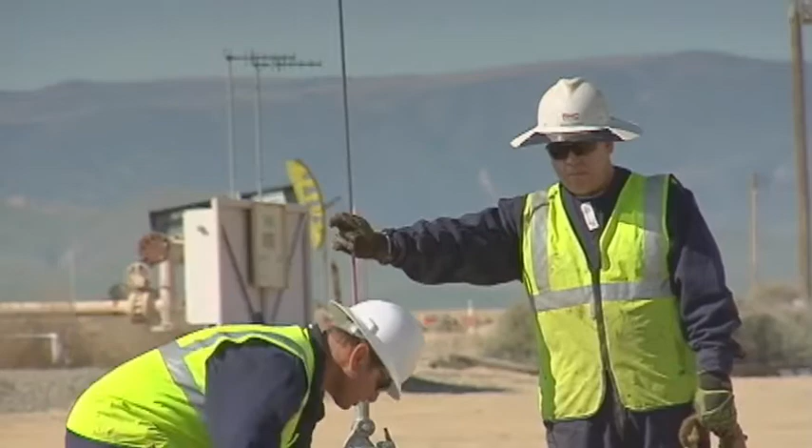This video is an overview of our safety expectations. We'll spend the next 30 minutes reviewing the critical safety issues that affect your work every day.

Let's start with the basics, your safety responsibilities. First, you must follow your company's safe work practices. Second, read the Contractor Safety Handbook provided by the producer. The handbook is your guide to safety expectations while working on our property. Keep it handy so that you can refer to it whenever you have questions.

We have developed this video to help you identify some of the hazards you might face on the job. Your company will give you details and training about the specific hazards at your job site. Hazard recognition and participating in safety tailgate meetings is important for you and your coworkers' safety.

Finally, some work areas will have additional requirements. Your company may have safety rules that are more strict than those of the oil producers. Check with your supervisor. You should recognize on-site safety rules cannot cover every possible situation. You still need to use your own good judgment.

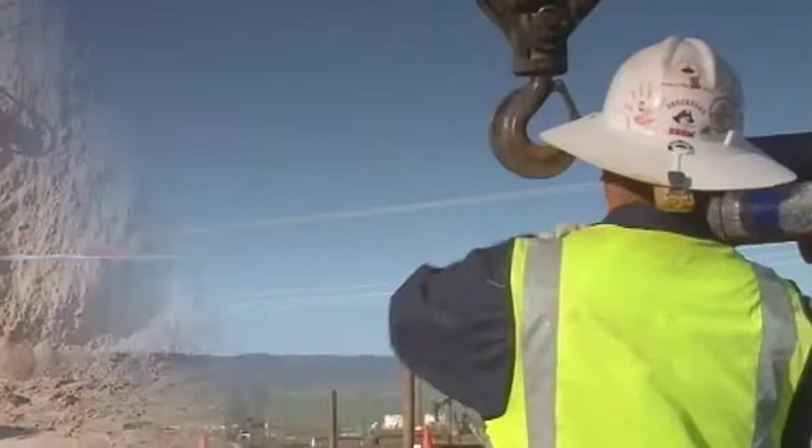As you begin your job, see that you wear proper clothing and the right personal protective equipment for your job. Stop any work that's not being done safely. You have the authority and the duty to stop unsafe work. Then correct the problem or safeguard the condition and report it to your supervisor.

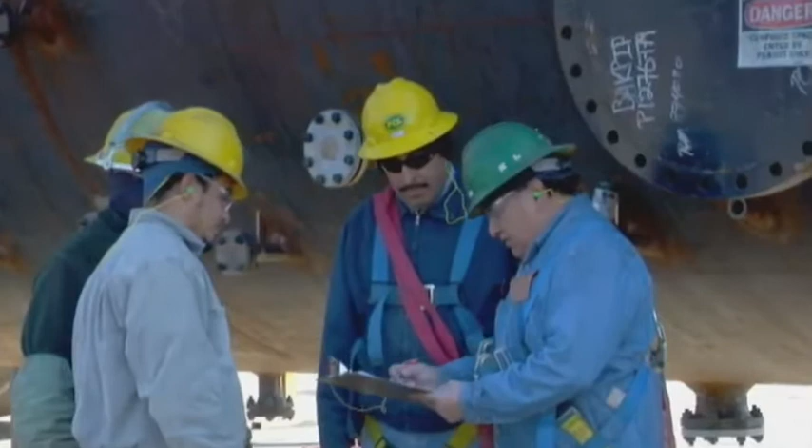All work must be planned. Your supervisor is responsible for planning work, but you must know and follow the plan. This planning includes emergencies and your responsibility to respond quickly in the event an incident or injury occurs.

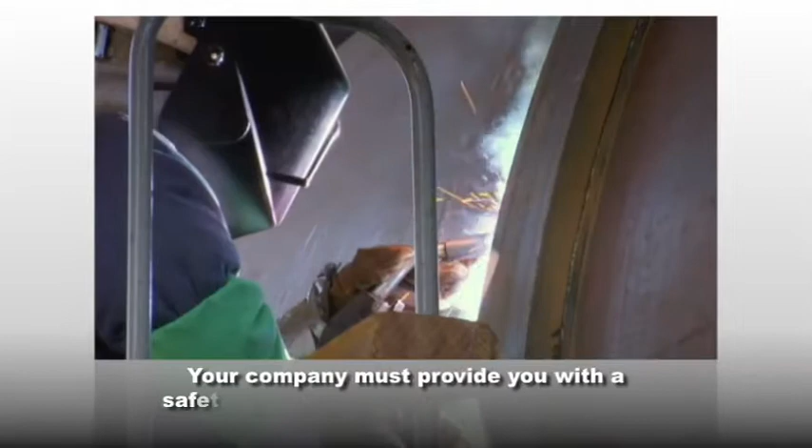Your company must provide you and your coworkers with a safety orientation and job-specific training. Your company must also provide the right tools and personal protective equipment in good working order.

Supervisors must know and follow all safety policies. They must notify the producer of incidents immediately, investigate all accidents, and then submit a report to the producer.

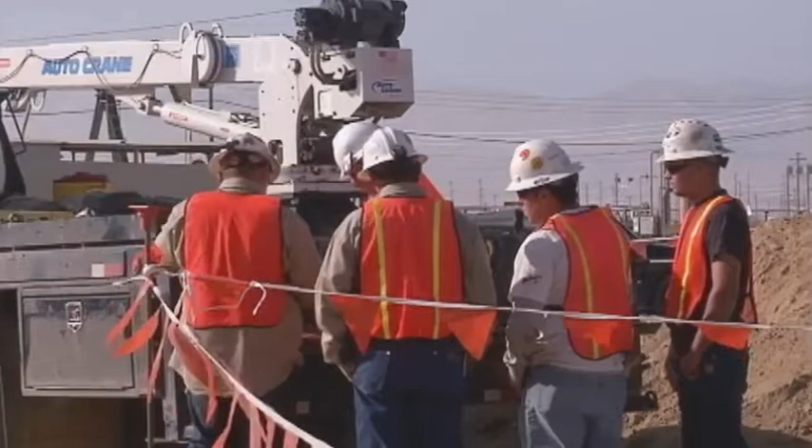Personal protective equipment, hydrogen sulfide (H2S), and respiratory protection. Now let's discuss the importance of personal protective equipment. Everyone who works at our locations must use basic personal protective equipment.

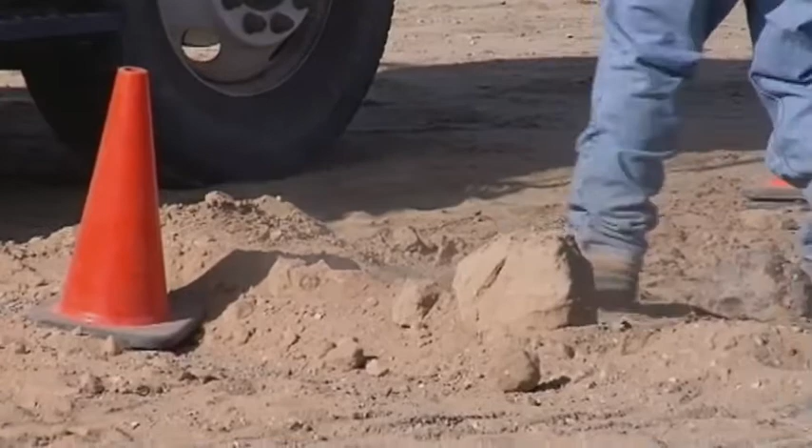We require everyone on the job site, including visitors, to wear an approved hard hat. Most producers require hard-toed safety footwear. Many producers require that everyone wear safety glasses with side shields or acceptable wraparound safety glasses. Some producers require snake chaps to be worn in certain situations.

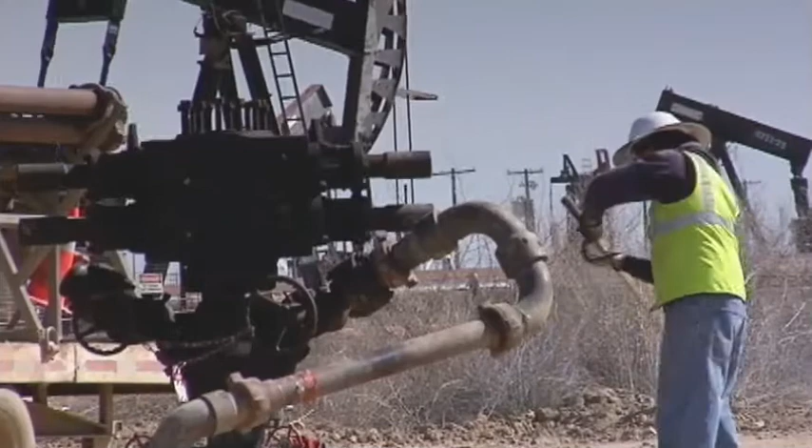Gloves must be used when the job requires it. You must wear proper work clothing, including long pants and a shirt with sleeves. Never wear loose or torn clothing or sleeveless shirts. Some producers do not allow hooded shirts or sweatshirts to be worn.

Most producers require fire-resistant clothing, FRC, to be worn. Consult with your supervisor with questions regarding this requirement. If your clothes get soaked with oil or any other substance that could catch fire or irritate your skin, change the clothes as soon as possible.

Some producers may have prohibitions regarding wearing rings or other jewelry while working on their properties. Please check with the producer you are working for regarding specific prohibitions or requirements.

Safety goggles and a plastic face shield must be worn when grinding, chipping, sawing, drilling, or hammering on metal. Chemical goggles must be worn anytime a splashing hazard exists. Approved hearing protection must be worn by all personnel working in or near posted areas, or if the job task requires it. Different jobs require specific safety equipment.

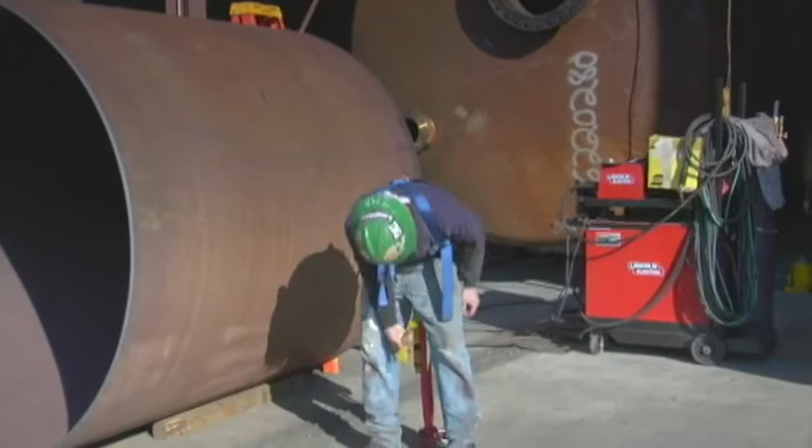For example, safety harnesses and lanyards must be worn by employees working at unprotected heights above the ground. Many locations produce crude oil and gas containing hydrogen sulfide, H2S, or sour gas. Hydrogen sulfide is poisonous and can be lethal in low concentrations.

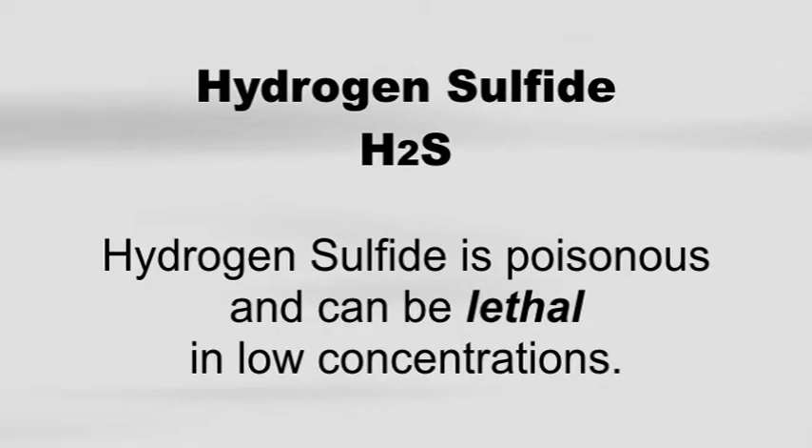All contract personnel working around production equipment, including well work and drilling operations that handles crude oil containing H2S, must be trained in H2S safety. Your company is responsible for providing you with appropriate respiratory protection and required training.

Many areas require the use of personal H2S monitors. You must be trained by your company in the operation of monitors. At a minimum, personal H2S monitors must alarm at 10 parts per million.

If your monitor alarms, move quickly crosswind, uphill, and away from the source. When working in a possible H2S environment, stay upwind of the potential source and plan a route of escape. Wind indicators are provided around equipment handling H2S and at rig locations. Never attempt to rescue an H2S victim unless you have a backup person available and have donned SCBA.

Communication is a critical part of any safety program.

Let's look at 3 important elements: the oil producer's safe work practices, the safe work permit, and energy control or lockout, tagout, blockout procedures. Safe work practices are a set of requirements that everyone must follow when working on our properties. A key section of safe work practices are the basic work rules.

Everyone must follow these rules at all times. Let's review these basic rules. Always act with safety in mind, both your own and your coworkers. Plan each job properly. Identify and address known hazards. Do not start the work unless you can do it safely. Stop or pause any unsafe job or operation.

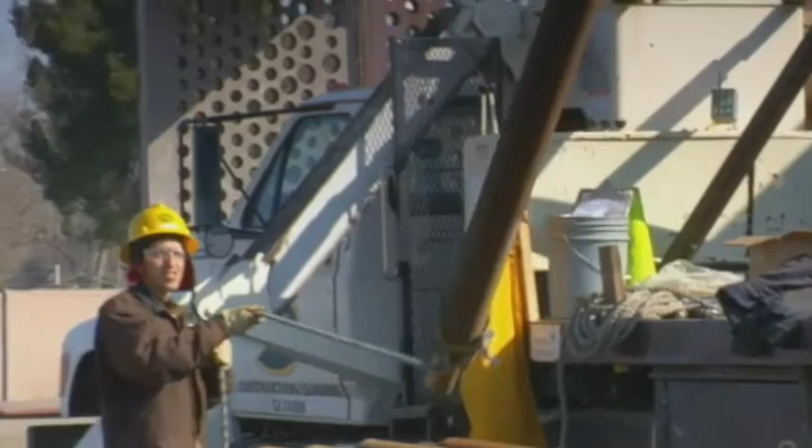Some areas in California can experience high daytime temperatures during work hours. Under these conditions, heat stress can be a serious danger and cause long-term illness or death. While working in these conditions, ensure that you and those around you drink plenty of water. Use good judgment during tasks that require strong physical exertion. If you feel too hot or experience dizziness or other symptoms, rest in the shade and carefully monitor your symptoms.

Seek medical help immediately if signs of heat exhaustion are manifest, such as hot, dry skin, profuse sweating, confusion or dizziness, nausea, or shallow breathing.

Do not work unless you are fit for duty. Do not work unless you are properly trained for the job. Do not take part in fighting, scuffling, horseplay, or any other activity that could injure someone. Comply with all posted warning signs. Wear required protective equipment. Use and maintain tools and equipment safely.

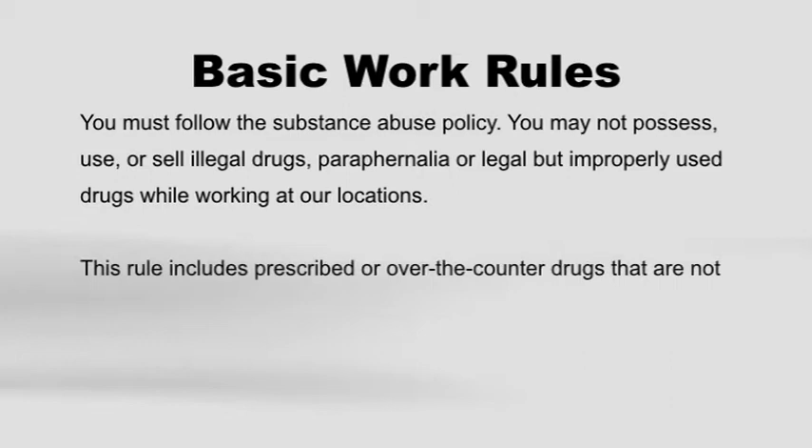Operate vehicles safely. You must follow the substance abuse policy. You may not possess, use, or sell illegal drugs, paraphernalia, or legal but improperly used drugs while working at our locations. This rule includes prescribed or over-the-counter drugs that are not used for the intended purpose.

Do not report or return to work when impaired by alcohol. You may not possess or use alcoholic beverages on our properties. You may not carry or use firearms, weapons, fireworks, explosives, live ammunition, or devices that will start fires. Do not remove, damage, or interfere with any safety device or warning sign. Smoke only in designated areas.

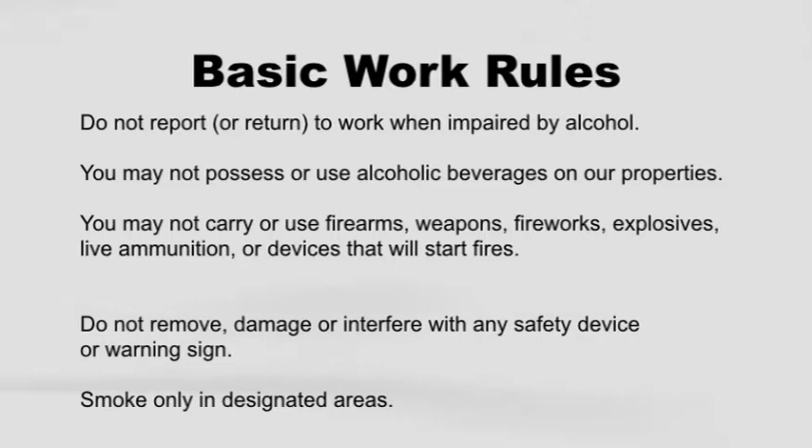Report all safety incidents to your supervisor right away. This includes personal injuries, equipment damage, and spills. Do not steal, damage, destroy, or remove any property belonging to the oil producers or its employees, contractors, or visitors. Make sure you have a means to call for help when working in isolated areas.

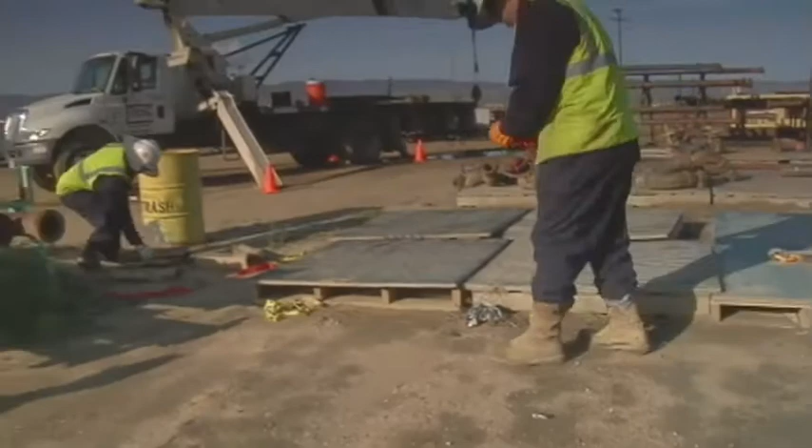Housekeeping rules are an important part of safe work practices. Always keep your work area clean and orderly. Make sure emergency exits are clear. Clean up mud, oil, grease, and litter right away. And make sure to collect trash and debris at least once a day.

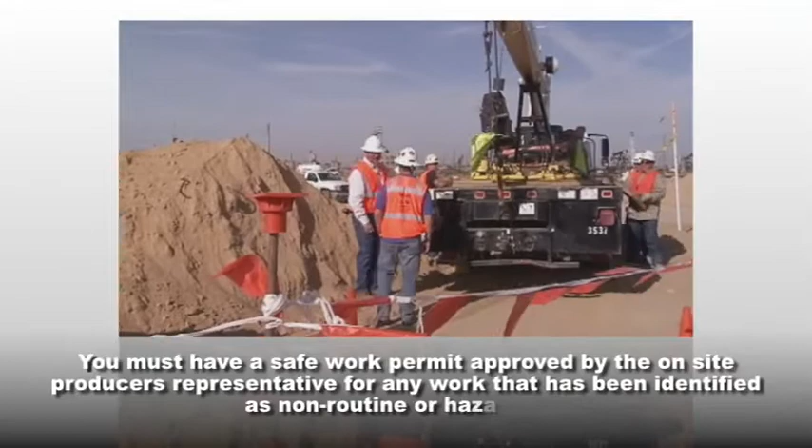You must have a safe work permit approved by the on-site producer's representative for any work that has been identified as non-routine or hazardous. Your supervisor will ask everyone involved to review the permit and then post it at the job site. Make sure you understand all the permit requirements before starting the job. Stop work if conditions change, a new hazard occurs, or an oil producer representative asks you to stop.

Now let's review some critical hazardous exposures that can be encountered while working on the oil producer's property. Hazardous stored energy. Energy control is required whenever you are performing tasks which involve equipment, machines, piping, or vessels which could potentially injure you due to a release of stored energy. Energy sources must be identified and isolated to a zero energy state before service and maintenance can be performed.

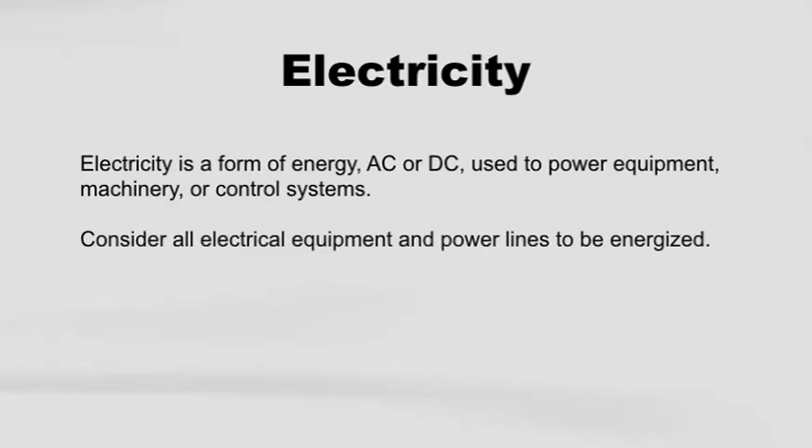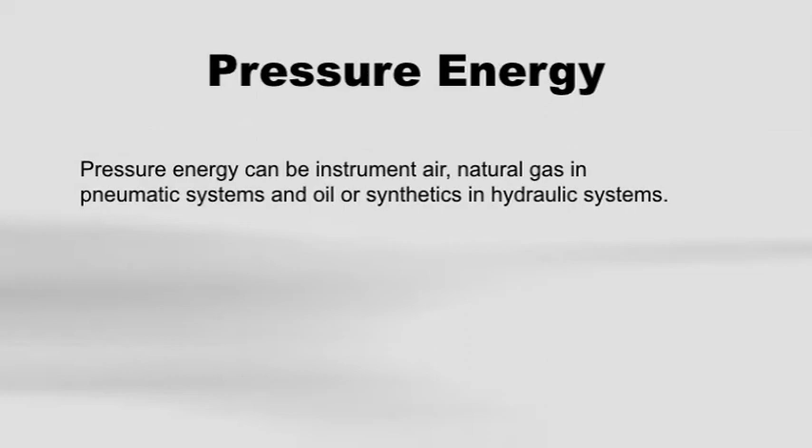Electricity is a form of energy, AC or DC, used to power equipment, machinery, or control systems. Consider all electrical equipment and power lines to be energized. Pressure energy can be instrument air, natural gas in pneumatic systems, and oil or synthetics in hydraulic systems. Momentum gravity energy is the force in moving equipment components caused by gravity or inertia.

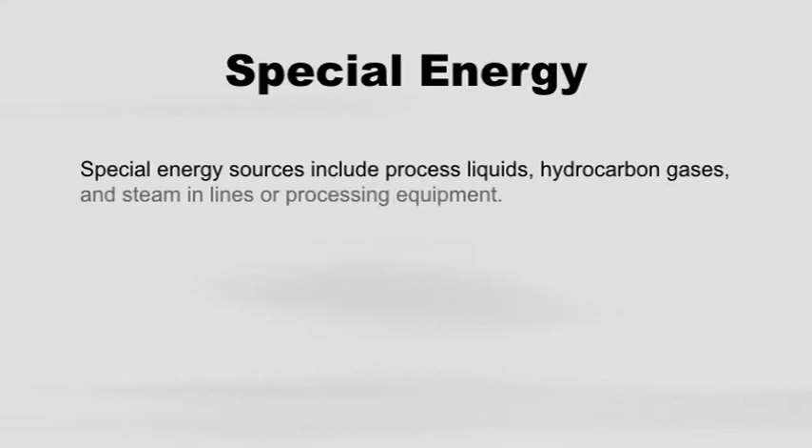It is critical to identify momentum energy after the power source has been shut off. Residual energy can occur after the power source has been shut off or disconnected. Special energy sources include process liquids, hydrocarbon gases, and steam in lines or processing equipment.

Methods of energy isolation. The following are ways to isolate energy sources. Positive physical isolation: remove spool, air gapping, blind flanges, slip blinds, double block and bleed, and lockout of energy source.

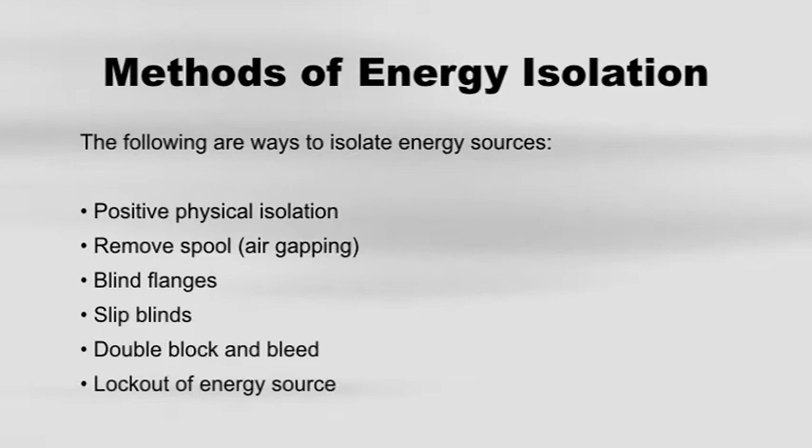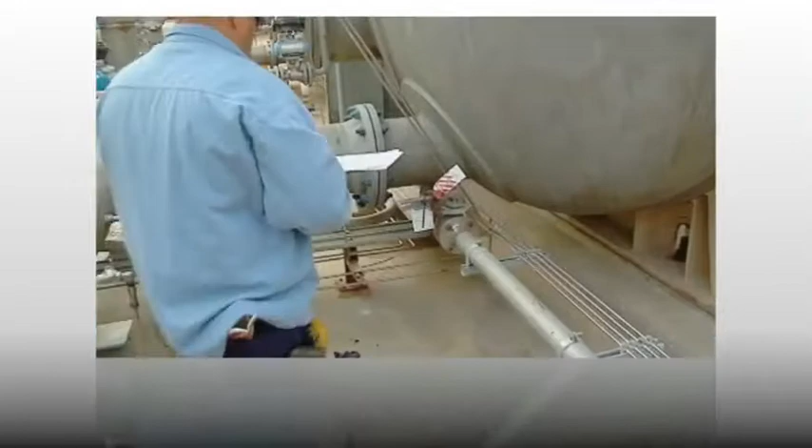Locks must be used with tags to isolate energy sources. Tags should indicate the person responsible for the lockout, the reason for the lockout, the job being performed, and the date. Each producer has developed equipment lockout, tagout, blockout procedures.

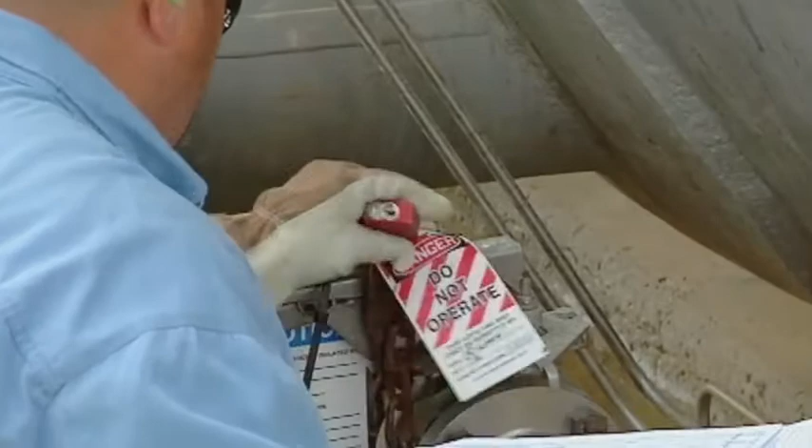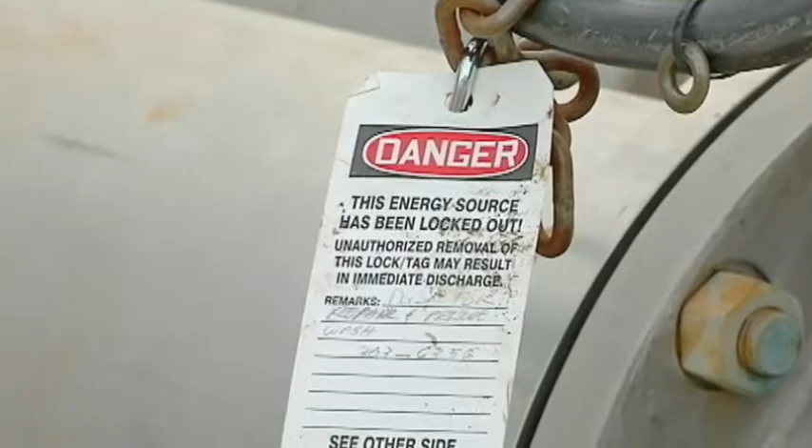Contractors must understand these requirements and assess how their own procedures will work in conjunction with the producers. Never shut down or start up equipment or open or close valves until you notify the producer's representative or have been directed to do so by the producer's representative.

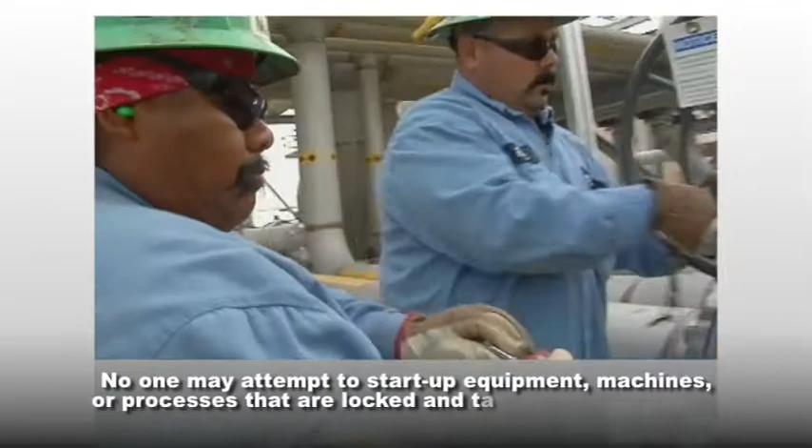Group locks can be used to isolate equipment for a group of workers. Lockout must provide the same level of protection as utilizing individual locks. No one may attempt to start up equipment, machines, or processes that are locked and tagged out of service. Specific procedures must be followed to restart, re-energize, or activate equipment or systems that have been isolated.

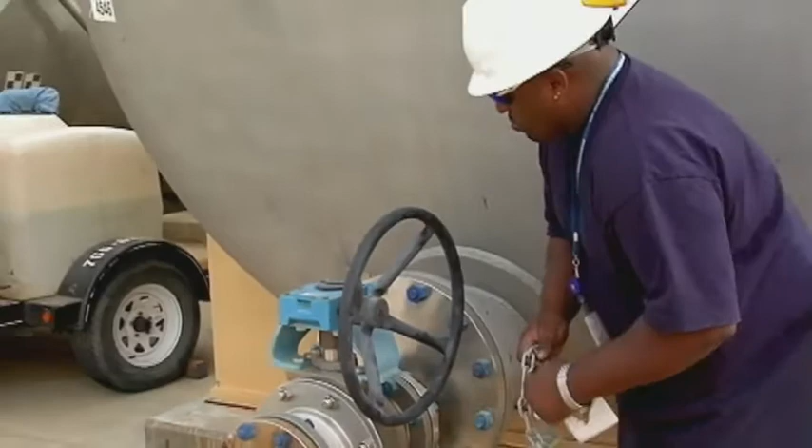The basic requirements which must be followed before isolation devices can be removed and equipment can be energized are: first, notify affected employees that the isolation devices are being removed. Second, check to ensure that all personnel are clear of the equipment or system to be re-energized. And third, locks used to isolate equipment can only be removed by the person who originally applied the lock.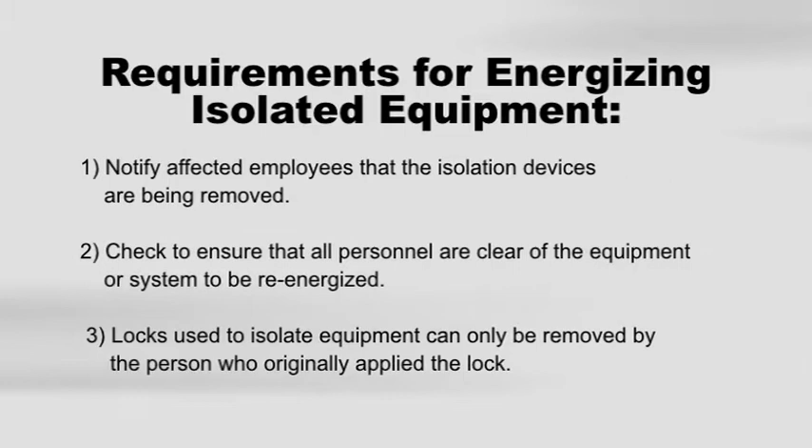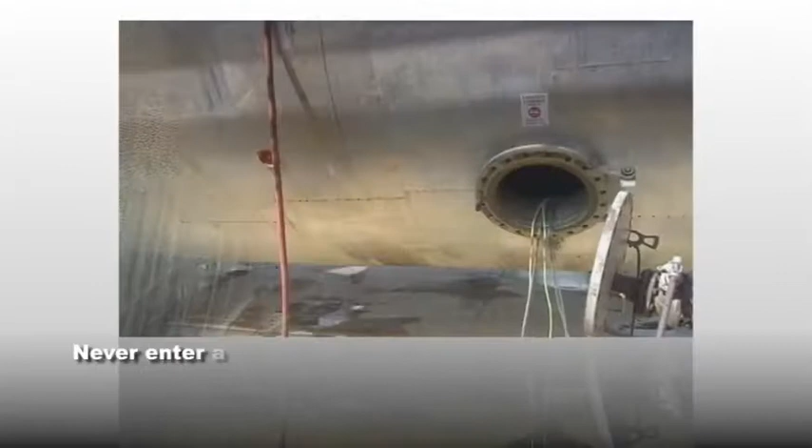Confined spaces. Confined space entry permits are required any time confined spaces are entered. Never enter a confined space unless you have received the appropriate training, have the right equipment, and have been tasked with work in that area. A confined space is any space that has limited or restricted openings for entry and exit and is not intended or designed for human occupancy, has the potential to contain flammable, toxic, or oxygen-enriched or deficient atmospheres, or contains any other recognized serious safety or health hazard.

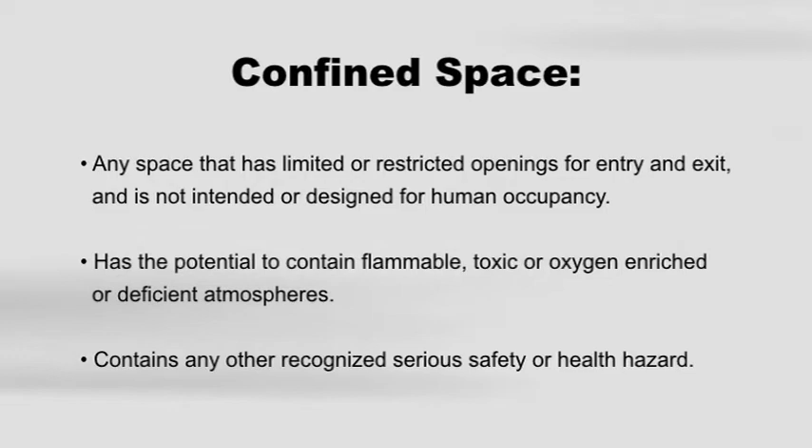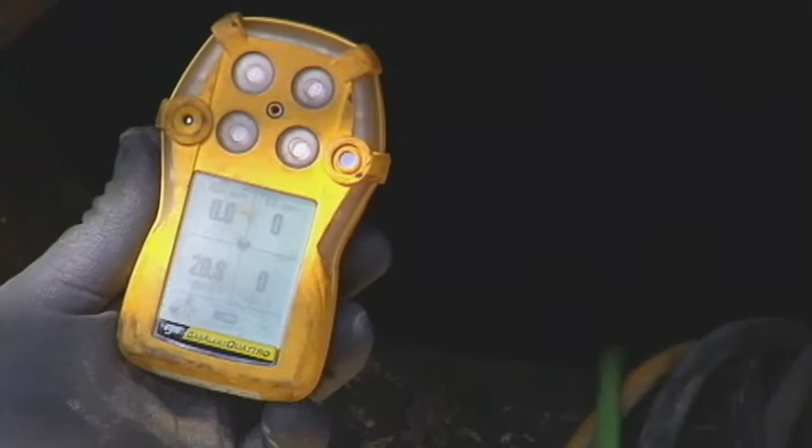A trained attendant or standby person must be assigned to a confined space entry at all times. Forced air ventilation equipment, appropriate lighting, rescue equipment, and continuous atmospheric monitoring may also be required depending on the nature of the hazard. Safe equipment operation is another important part of injury prevention.

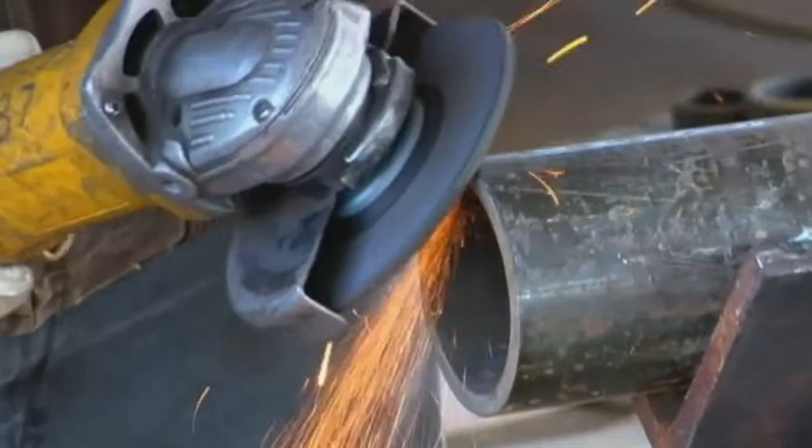Only designated and qualified people may operate power tools, equipment, or shut down equipment.

Safe vehicle driving. You must have a valid driver's license to drive on our property. Practice defensive driving, obey posted speed limits, drive only on the prepared roads, wear seat belts at all times, use pull-through parking whenever possible to avoid unnecessary backing. If you must back up heavy equipment, have a spotter signal you. Some equipment requires backup alarms.

Some producers require that you never leave your vehicle unattended while it's running. At these locations, stop the motor and set the parking brake and put the transmission in low gear. Chock your wheels if you think there's a possibility the vehicle might roll.

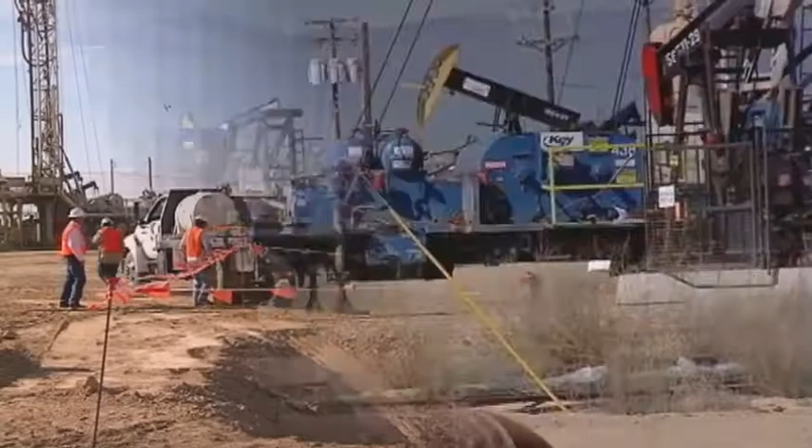Some oil producers may have special driving procedures or rules in their areas, such as specific speed limits and prohibitions regarding cell phone use while driving. Be sure to check with your supervisor at your work location for any special requirements.

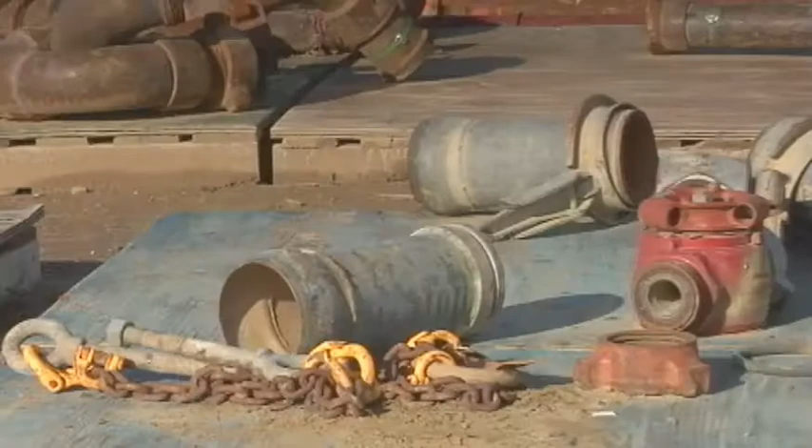Ergonomics. Always use safe lifting techniques. Improper lifting is the most common cause of back injuries. Face the load you're about to lift. Bend your knees and hold the object close to your body. Keep your back straight. Use your legs, not your back, to lift the load. You should never try to lift more than 50 pounds by yourself.

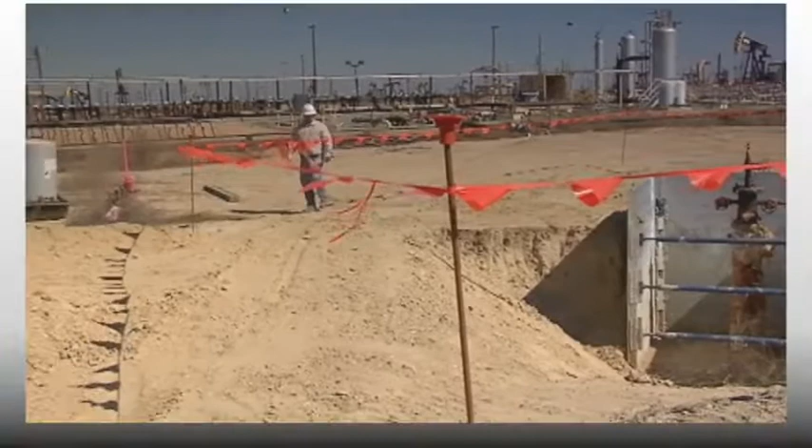Excavation and trenching. Unless otherwise determined by a competent person, all soil at our locations is considered to be Class C sandy or loose soil. A competent person is required to be on site. For our operations, the Cal OSHA regulation for excavation or trenches deeper than 5 feet shall be followed when personnel are required to enter. Proper protective measures shall be taken, such as sloping, shielding, or shoring. Barricades are always to be installed for any open excavation or trench.

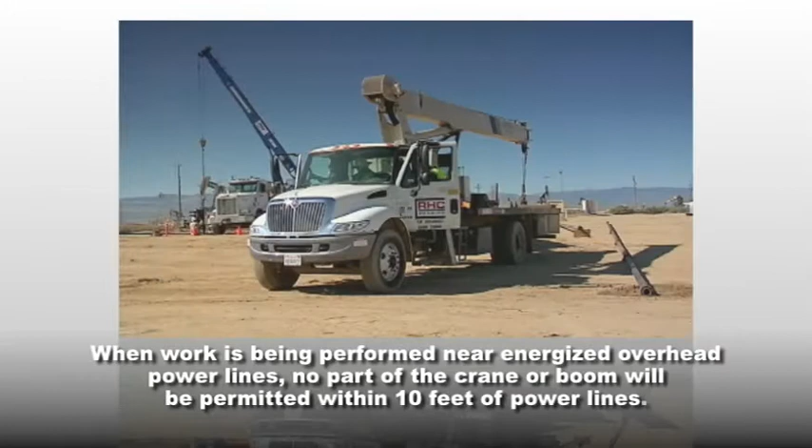Cranes and rigging. All cranes must be operated by qualified operators. A qualified signal person must also be on duty. All power lines should be considered energized unless proper measures have been taken for de-energizing. When work is being performed near energized overhead power lines, no part of the crane or boom will be permitted within 10 feet of power lines. Consult with your producer representative for specific power line clearance requirements in your location.

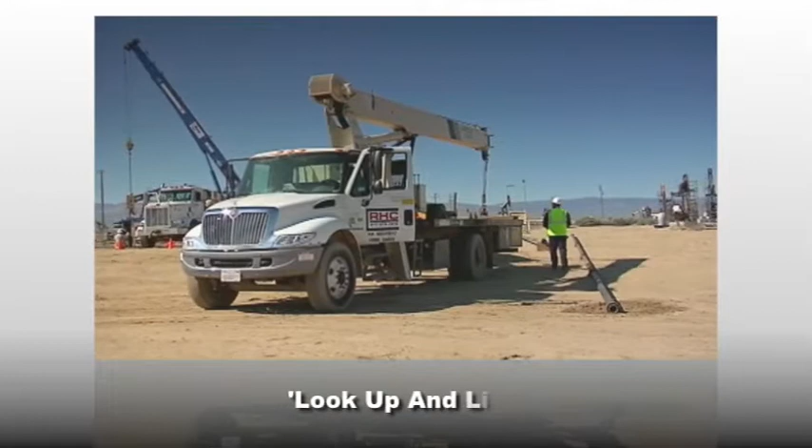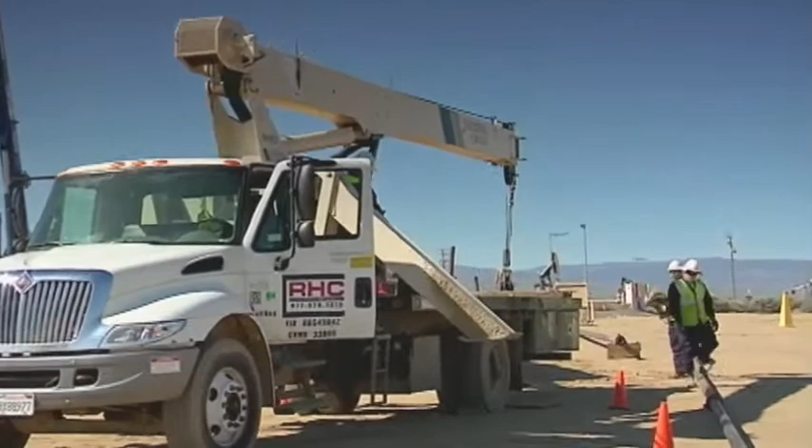Most California oil producers recommend the use of the Look Up and Live flag procedure for crane operations at their sites. This procedure is designed to keep the crane operator from overlooking or forgetting major steps in the operation of his or her crane. The crane operator shall remove the flag from the load line or lifting hook and look up for power lines while walking around the crane. The operator then attaches the flag to the top of the steering wheel of the vehicle.

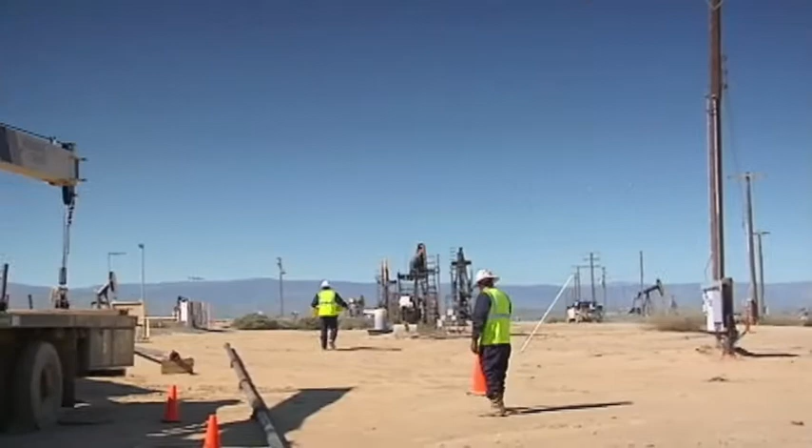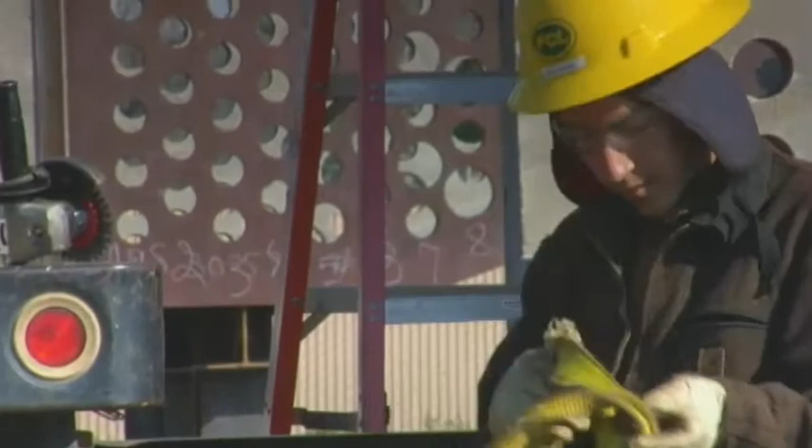If power lines are on location, they must be identified by placing cones 10 feet out below the lines. When crane operations are complete, and before any driving begins, the crane operator shall remove the flag from the steering wheel and clip it to the load line. Rigging methods depend largely upon the job to be done. It is important to check all phases of the job and all possibilities of job deviation, which may affect the rigging components.

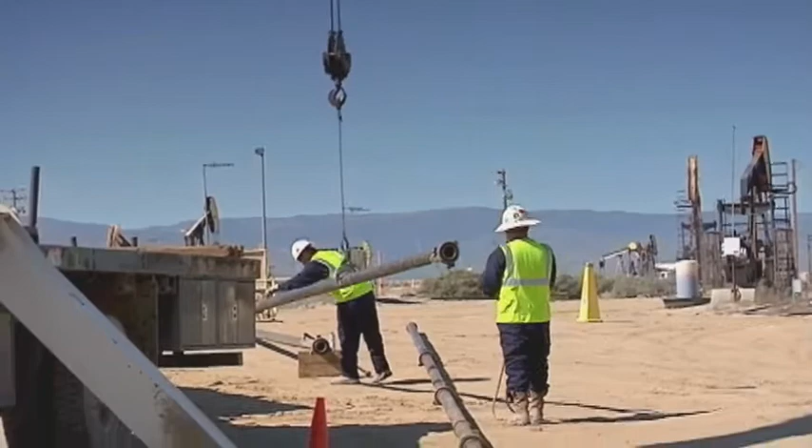Loads should be controlled by use of a tag line or snub line. Never walk or work under a suspended load.

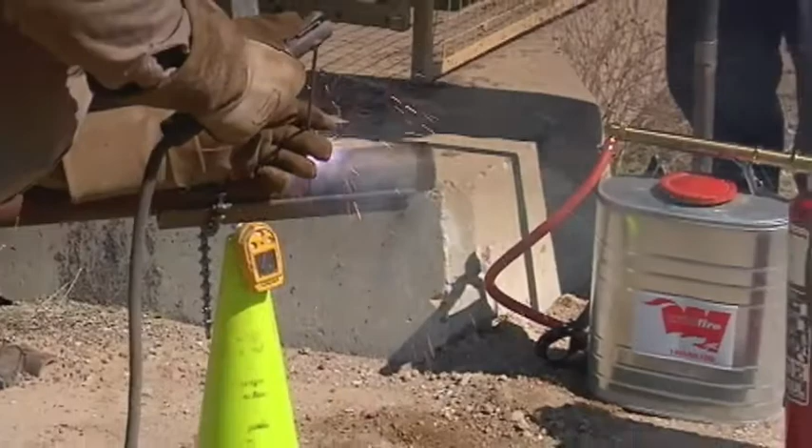Safe welding. Welding operations include a high risk of fires and injuries. Be on the lookout for conditions that could lead to a fire and take fire prevention measures. Always keep a fire extinguisher on hand. Be sure to use guards on grinders and wire wheels.

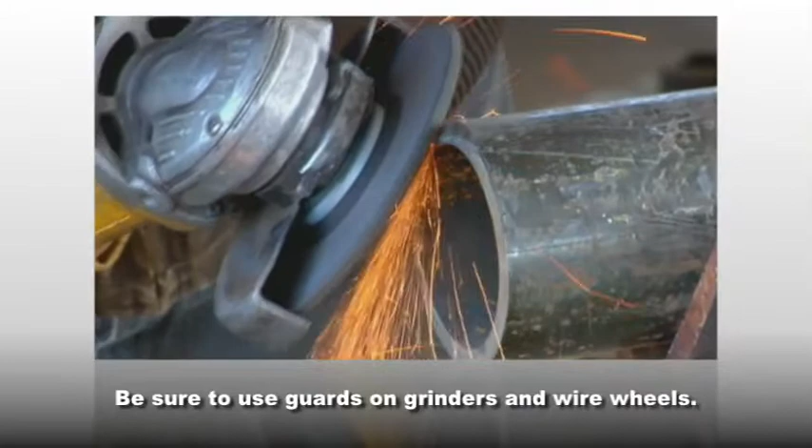Fire prevention is a serious concern in every job. Never smoke or use open lights around crude or petroleum tanks. Before welding, cutting, or grinding in a grassy area, remove any material that might burn.

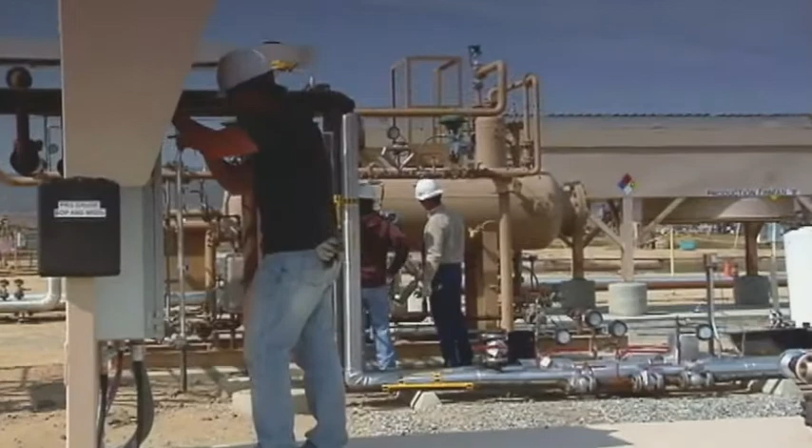Every location has its own emergency action plan. You must know your location's plan and be able to take quick action if an emergency occurs. When an emergency occurs, immediately shut down work in a safe manner and report to the designated evacuation area.

General environmental rules. Air emissions. California oil producers are committed to protecting the environment. We ask that you make every effort to help us meet this goal. We are required to maintain leak-free facilities to comply with our air permits. We ask your help to ensure that all fittings are made up tight and that all sources of gas leaks are plugged off.

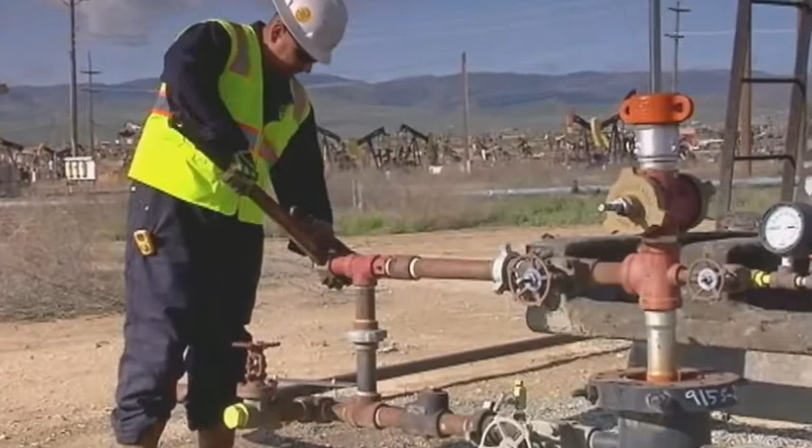Spill reporting. You are required to immediately report any spill or release of materials, including crude oil and/or condensate, to a producer representative.

Stream channel protection. Disturbance to navigable waterways, stream channels, or any other watercourse with habitat that may support endangered species in its bed or banks must be approved by the producer. Disturbance to stream channels requires permitting prior to commencing any work on the stream bed or bank.

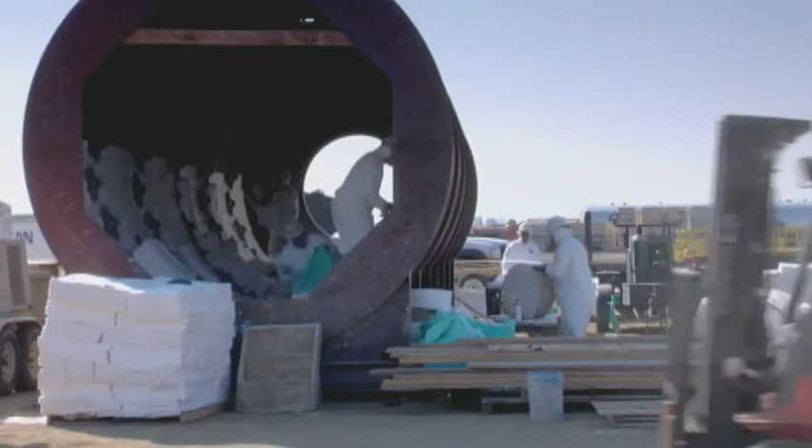Waste disposal. Any job is not complete until all waste and trash are removed from the job site and disposed of properly. The contractor is responsible for the disposal of all trash and waste generated by their activities. The disposal method must be approved by the producer. If you have any questions about hazardous waste, please contact your supervisor or oil producer representative.

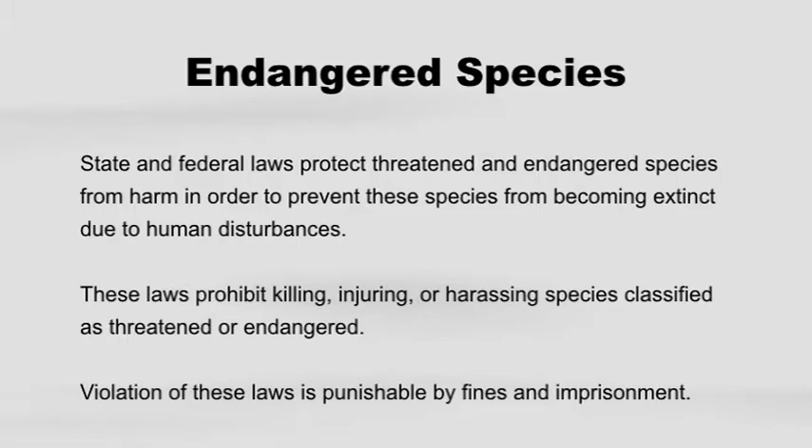Endangered species. State and federal laws protect threatened and endangered species from harm in order to prevent these species from becoming extinct due to human disturbances. These laws prohibit killing, injuring, or harassing species classified as threatened or endangered. Violation of these laws is punishable by fines and imprisonment. Endangered species are known to exist in most California oil fields. Contact an oil producer representative at your work location for a list of endangered species present at that location.

Now let's take a look at work areas where you may face certain specific hazards. Keep in mind that this video is a general overview of some of the common hazards. Your company will give you details and training about specific hazards at your job site. Your Contractor Safety Handbook includes a more complete list of hazards you may face while working at our locations. In the following segment, we will review possible hazards in major areas, including site-specific general hazards, hazards associated with wells, and hazards at and around our facilities and equipment.

Let's start with general hazards. Our fields contain a vast network of above-ground and underground lines and pipes, which carry a variety of potentially hazardous fluids. You must always be aware of these lines and watch out for them while working. For example, be careful not to drive over an exposed pipeline.

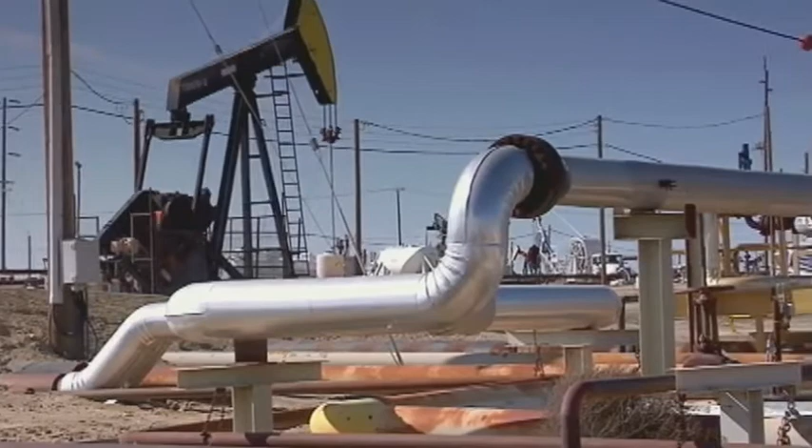Above-ground lines include hydrocarbon pipelines, steam lines, fresh and produced water lines. And remember, these lines may be very hot. You could get a severe burn by touching a line. Many hydrocarbon lines contain products that may include hydrogen sulfide, commonly called H2S. As we mentioned earlier, H2S is a poisonous gas that's heavier than air.

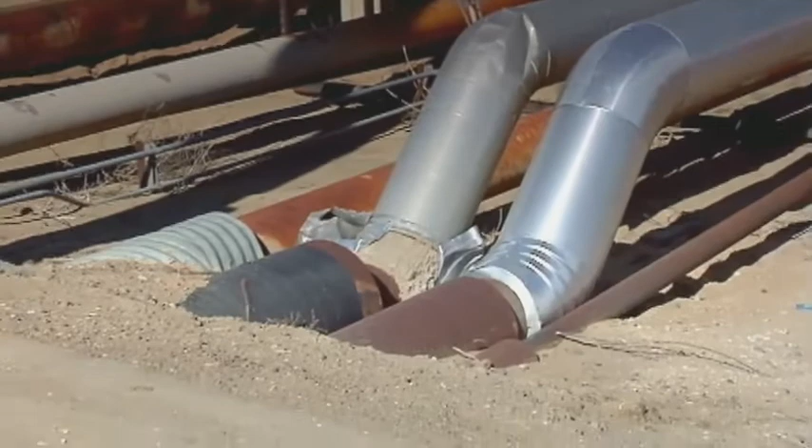Underground lines, although we cannot see them, may be more hazardous than above-ground lines. Be extremely careful when doing any excavation work. We can provide maps that show the type and location of underground lines. Always talk to your supervisor and the producer representative before digging.

Most oil fields have subsurface valve boxes. Valve boxes are low spots where H2S and other harmful vapors may accumulate, and a valve box is a confined space.

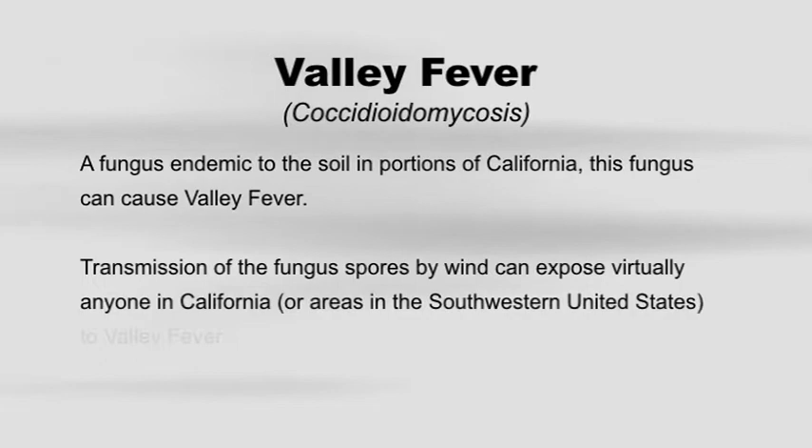Valley fever is a fungus endemic to the soil in portions of California. This fungus can cause valley fever. Transmission of the fungus spores by wind can expose virtually anyone in California or areas in the southwestern United States to valley fever. Workers who perform tasks that disturb the soil may be at a higher risk.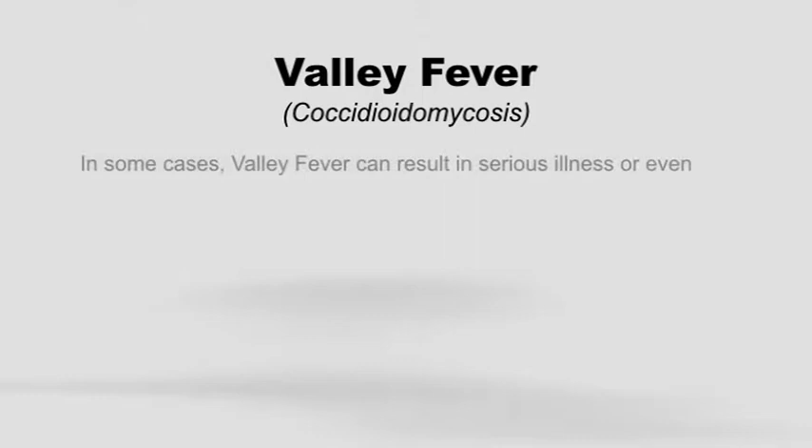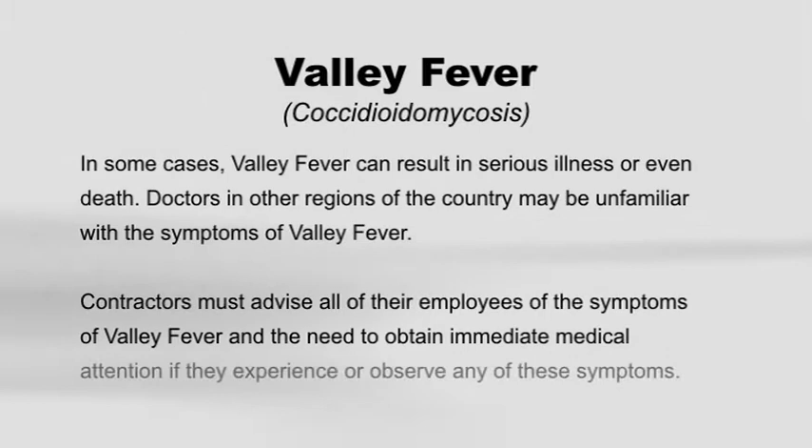In some cases, valley fever can result in serious illness or even death. Doctors in other regions of the country may be unfamiliar with the symptoms of valley fever. Contractors must advise all of their employees of the symptoms of valley fever and the need to obtain immediate medical attention if they experience or observe any of these symptoms.

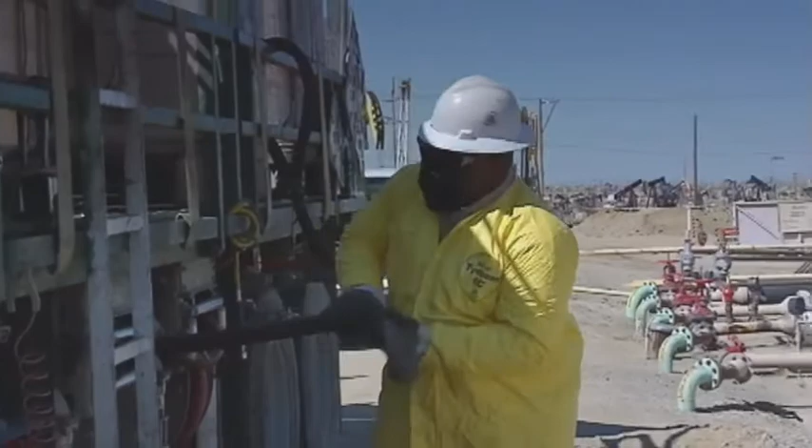Chemicals are another general hazard you may encounter anywhere in the oil field. Many of them can be harmful. Always read the materials safety data sheet before working with any chemical. Follow the precautions carefully and wear the appropriate personal protective equipment.

The last category of general hazards includes plants, insects, and animals. You may find poison oak at some work sites. Learn to recognize this plant and stay away from it.

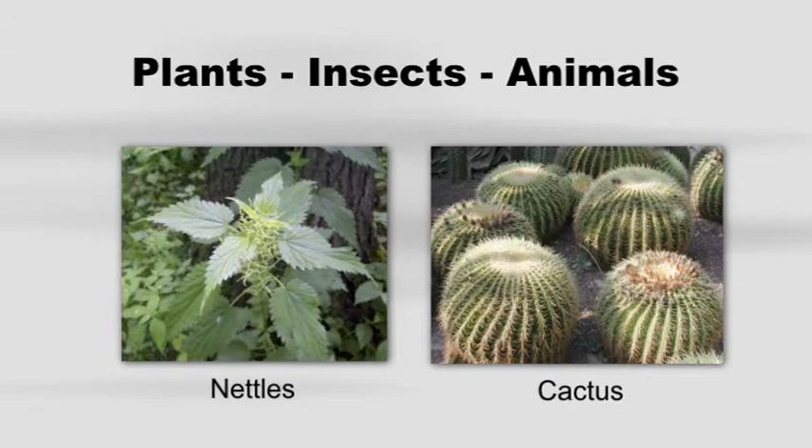Plants such as cactus and stinging nettles can cause painful injuries. Always be careful when working around plants with thorns.

Bees, spiders, and other stinging insects are common everywhere in the oil field. Watch out for insects when working in areas where they live.

Snakes, including poisonous snakes, live in many of our areas. Watch where you walk and look around before reaching, especially in areas where snakes may hide.

The second group of common hazards is associated with wells. Our oil fields contain several types of wells, ranging from producing wells to injection wells. Each type has its own hazards.

The most common wells are heavy oil producers used in thermally enhanced production. Fluids from these wells may be very hot and may contain H2S and other flammable gases.

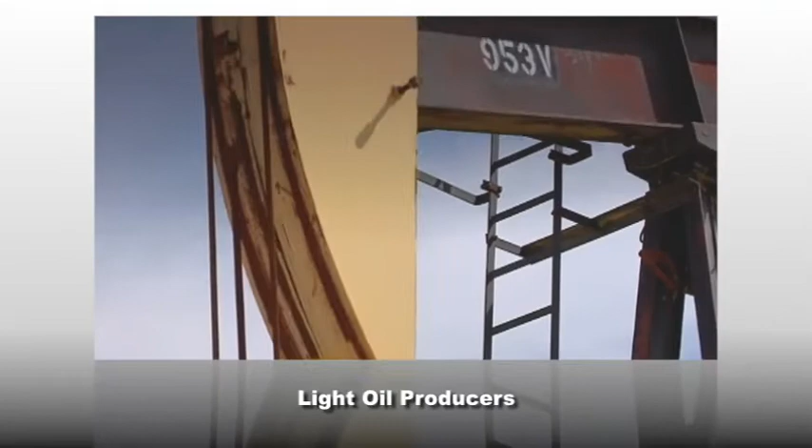Other wells produce lighter crude. These wells present a special fire hazard because the oil they produce has a lower flash point than heavy oils.

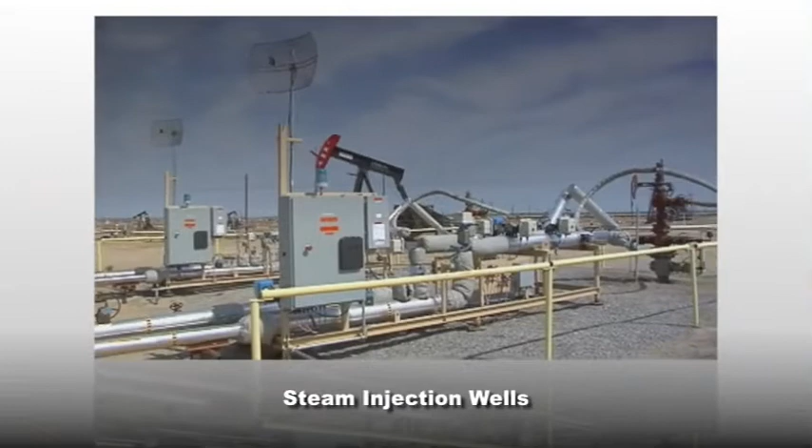Steam injection wells pose high temperature and pressure hazards. They also contain large volumes of hot steam and possibly H2S.

Also, be aware of high pressure and possible high temperature hazards when working around water flood injectors.

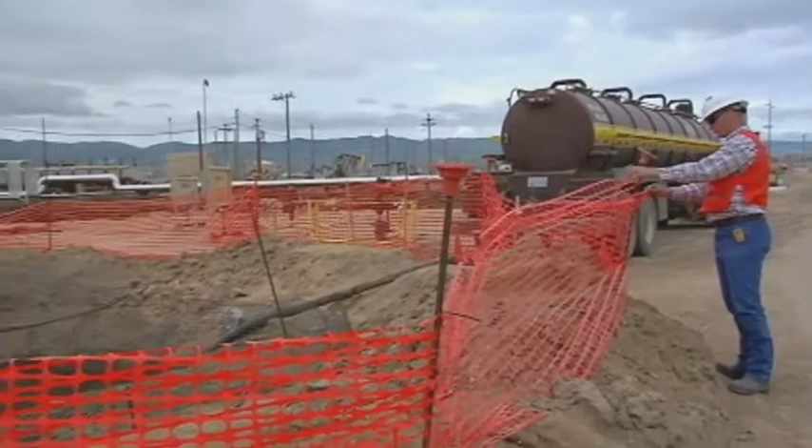Drilling sumps or reserve pits at drilling or workover locations have flags or fencing marking the boundaries. Be very careful when driving near active drilling or workover operations.

Our third group of hazards occurs in and around facilities. Steam generators are essential to produce California's heavy crude, but these generators involve a number of potential hazards.

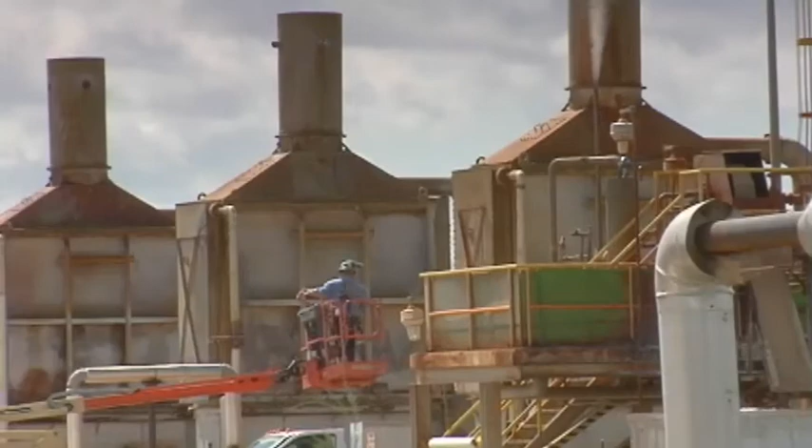Never go into a generator site unless your job specifically requires it. The most obvious hazards are the very high temperatures and pressures needed to generate steam.

High noise levels are another possible hazard. Always wear hearing protection when working around steam generators.

Steam generator sites may contain hazardous chemicals, such as the caustic used in the scrubbers.

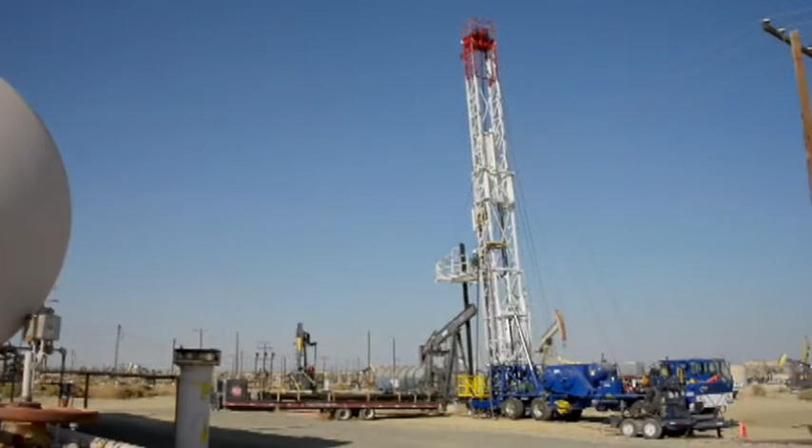Drilling and well servicing crews must pay close attention to the wind direction when working near a generator. Never work in the path of a flue gas scrubber plume.

These plumes may contain small amounts of caustic vapor and sulfur dioxide. Both can be irritating if you breathe them or get them on your skin or in your eyes.

Casing vapor recovery units, or CVRs, collect the casing gases from nearby wells. CVRs are a possible source of H2S and other flammable gases.

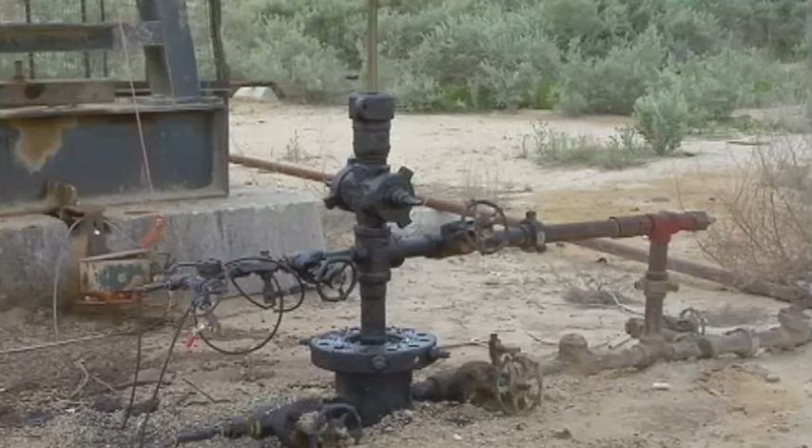Test stations are accumulation points for the flow lines from producing wells. Never operate any valve at these sites without prior specific instructions. Closing a flow line inlet valve while a pumping unit is operating can cause packing failure or line rupture.

Gas plants and cogeneration plants, like other major facilities, are often fenced. These plants are limited access areas. All workers must check in, and only those with required jobs and proper training will be allowed inside.

Tanks are another potential hazard in our operations. Empty tanks pose a risk of fire or explosion, since they often contain oil and flammable vapors.

An empty tank is a confined space when going inside. Never walk on top of a tank without obtaining the producer's approval and taking necessary precautions.

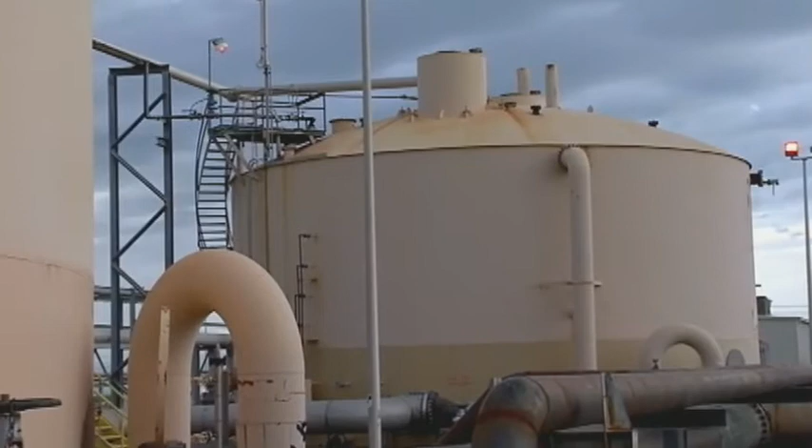Radiation is a possible hazard in some areas. We sometimes use radioactive materials for drilling, well servicing, and X-raying pipe. Be alert for radiation warning signs and don't go inside a posted area.

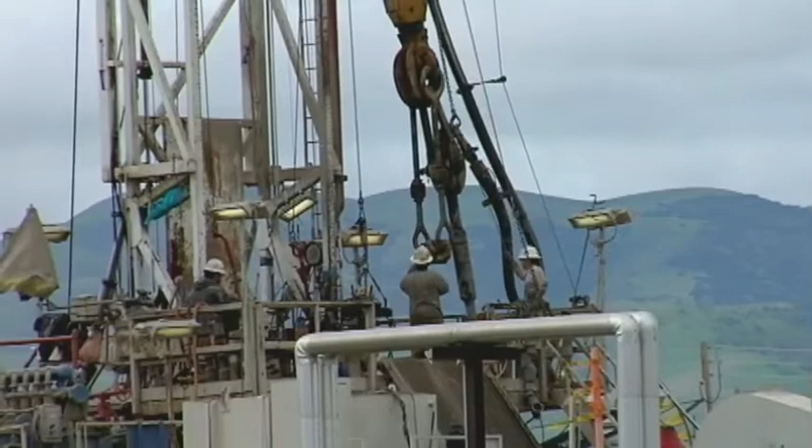Drilling, construction, blasting, well servicing, and well workover operations all present different hazards. Never go into a specialized work area unless your job requires you to be there.

For those of you who may work in the offshore environment, you will receive a thorough orientation about the hazards you can encounter there, prior to and upon arrival at the offshore platform.

Now that you've seen the areas where you may encounter hazards, you're ready to learn more about these potential hazards and how to protect yourself.

Your company will provide this specific training. Stay alert for possible hazards and use the appropriate personal protective equipment.

Be sure to ask questions if you don't understand the hazards of a job. If you're not sure how to do a job safely, don't do it. See your supervisor for more instructions.

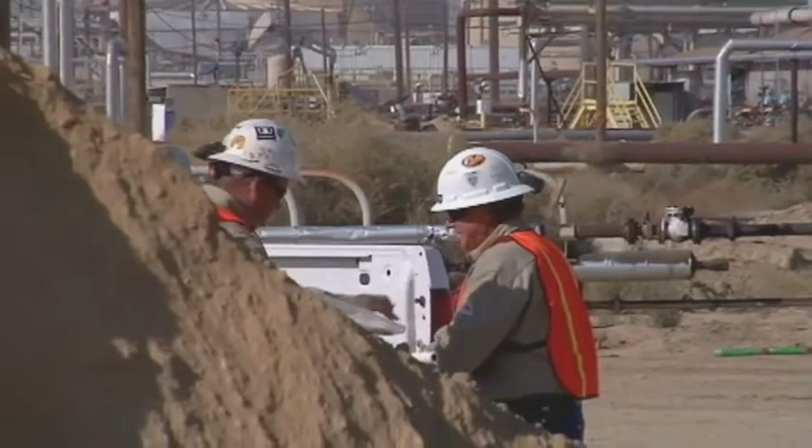Remember, the California oil producers and your company have a strong commitment to safety. We both have the responsibility to provide a safe workplace and to inform you about possible hazards.

You, in turn, have the responsibility to know and follow our safety procedures, to stop any work that's unsafe, and to practice safety every day in every job you do.